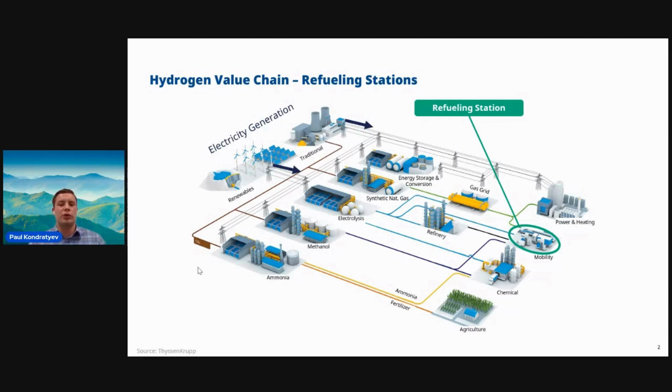and mobility. Anywhere you have compressed hydrogen. I'll be focusing on gaseous hydrogen only, although liquid hydrogen, as the previous presenter mentioned, is also something that shows promise. But I'll focus on the gaseous side, which is a little bit more mature of a technology. So the insights I'll be sharing with you will be relevant throughout the value chain, but I'll focus on mobility.

And one question I'd like to start with is, just ask yourself this question: what do you think is the number one thing that station manufacturers can do to ensure that they're successful, that hydrogen as an alternative fuel is successful? And to me, the answer to that is providing the same user experience as traditional refueling.

And the reason for that is, I think the only way that hydrogen can be the choice of alternative fuel ahead of battery electric is in those use cases where users really do not want to wait as long as batteries need to charge, and are really seeing the value of hydrogen over battery electric, and seeing it as a cleaner alternative to traditional fueling.

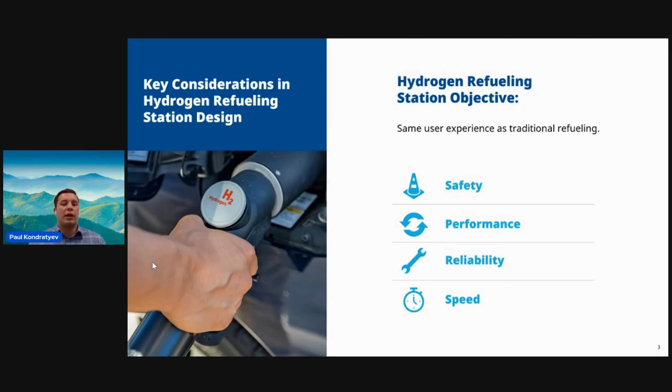And so there are 4 considerations that I will speak about today from a station design perspective that allow this similar user experience to traditional refueling. And those 4 are safety, performance, reliability, and speed. Okay, so let's dive into the first one with safety.

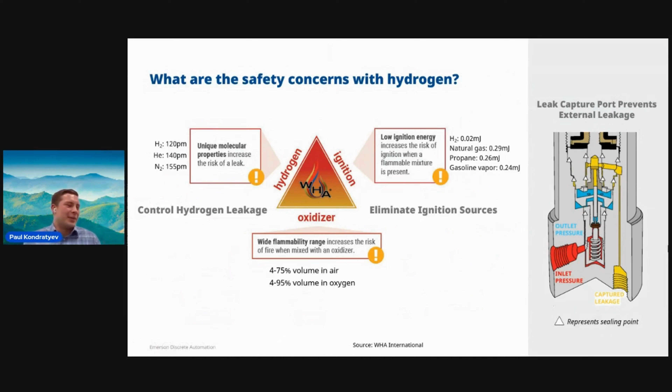And I know talk of the Hindenburg and safety with hydrogen is often a touchy subject. And I want to echo the sentiment of the previous presenter, that hydrogen does present certain safety challenges. However, those are manageable. And so I'd like to speak to those challenges a little bit here with regards to gaseous hydrogen.

First and foremost, hydrogen being a tiny molecule, it is very prone to leakage, right? So here on the left-hand side, I've got some general molecular radii or diameters to compare the molecules against each other. And you can see with its tiny size, no matter how good your seal is, eventually, as it starts to wear and tear, you're going to get some small amount of leakage. And so that's the first factor in considerations of hydrogen safety.

Now, that first factor means nothing if you don't have the other 2 in mind. Low ignition energy and wide flammability range mean that whenever you do get that little leak of hydrogen, once it accumulates to about 4% or greater percentage of volume in air or oxygen, it becomes prone to ignition with very, very little ignition energy from any spark or ignition source that you have in the system. And so that's what, as a component manufacturer for valves and regulators, Tescom provides for refueling stations.

We try to eliminate or control any hydrogen leakage and eliminate ignition sources. And one example of how we do that in a pressure regulator, here we have a cutaway on the right-hand side: if you look at the white triangles, those represent the sealing points in the system. And if you follow the outlet pressure, the blue outlet pressure here, these seals are eventually going to have some sort of leakage when you use these regulators over and over.

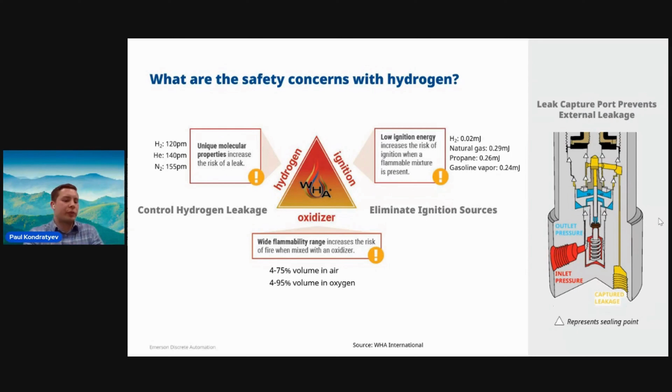And so what we'd like to do is capture that leakage with the yellow area. I can't see my own mouse, but the yellow area in the cutaway represents that captured leak port. That means that the leakage never leaves the system, but rather is captured and vented away to a safe location in a safe manner. So you never have hydrogen accumulating within your dispenser or some other system. So that's safety.

Moving on now to performance. And this is to me a very interesting topic. So on the left-hand side, what you have here is a representation of a hydrogen dispensing event per the SAE J2601 fueling protocol, and there's other protocols in development, but the concept stays the same. The station needs to make sure that the pressure is ramped from lower pressure to higher pressure during the fill, and what you get is this increase in temperature.

And there's two reasons for that. Number one, the negative Joule-Thomson effect of hydrogen. When it expands, it heats up, unlike other gases. And second, you're jamming this pressure into a finite storage, so you're going to get some heat generated. And so in order to stay below the temperature limit of the vehicle tank and not overheat it, the pressure ramp rate has to be controlled carefully so as not to fuel too quickly. You also don't want to go too slow, or the user will have a poor experience.

Therefore, stations are relying on pressure regulators controlled by PID controllers, such as here in this case, a TESCOM pressure regulator with the ER5000 electropneumatic regulator that takes in a pressure set point from the PLC or whatever controller sends that pressure set point, and the controller is able to compare the pressure downstream at P2 to the set point and adjust accordingly, so you can follow that ramp rate live and adjust it as needed based on the operating conditions of the system.

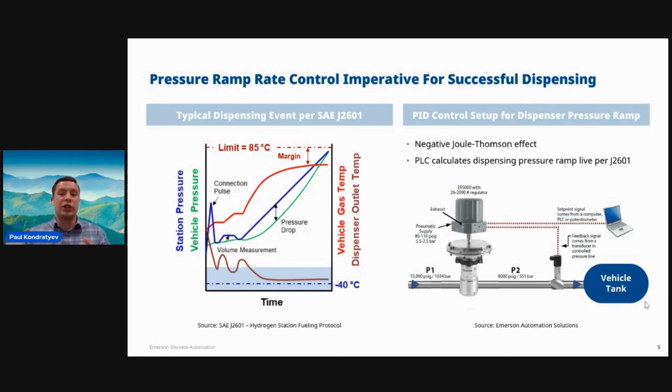Number three, maintenance and reliability, huge. So one of the standards that we like to refer to in hydrogen refueling for valves and regulators is the ISO 19880-3 standard. And it gives us an idea of what we can expect from this harsh environment of hydrogen. And why it's harsh is the high pressures, obviously 15,000 PSI is often the upper pressure limit in a refueling station. When that's cycled back and forth on a valve, especially at cold temperature, the elastomers get really beat up.

And so the guidance per the standard is to replace the soft goods at 16,000 cycles, which, just doing some estimating, at 50 fueling events per day gives you about 6 months of operation. So what we like to do is provide the station operator the easiest maintenance possible. So with the TESCOM VA series valve, you can see here the bonnet is easily removable and replaced with a cartridge swap that allows for fast maintenance. And even in general, obviously, the number one goal is reliability and station uptime.

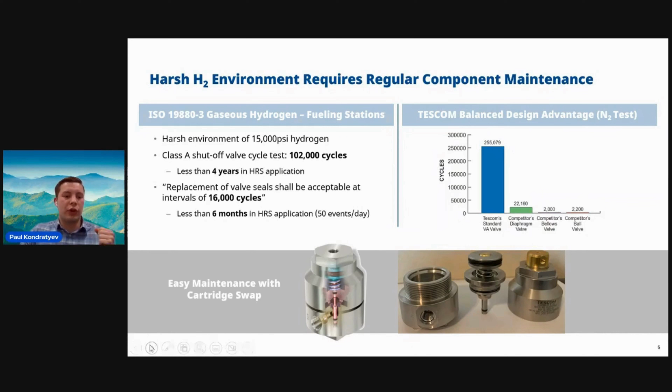And so the best way that we can help the station continue to operate without any extra downtime is by using our technology that we know works better than competition in terms of the travel that the valve has to do compared to a diaphragm valve, a bellows valve, or a ball valve. And so that's something that we know is of value to station operators. So that's reliability.

And as the technology is becoming more mature, we're recognizing that hydrogen as an alternative fuel is most valuable to these heavy duty vehicles, either semi trucks, class 8, or off-road vehicles, stuff like that. And so now you're looking at fueling a 100 kilogram tank, and you want to stay reasonable in your user experience so that these long haul companies choose hydrogen vehicles over battery electric. So that puts some restrictions on the designers of the station.

Now you've got to fuel a 100 kilogram tank in 10 minutes, which gives you a much higher flow rate, almost 5 times what you've had in the past. And so the way that you can achieve that is you really have 2 levers as the station manufacturer. You can either increase your pressure drop, right? Because if your high pressure storage, using that protocol, if you remember the ramp rate, is fueling the lower pressure vehicle tank, you can either increase your delta pressure, the difference of the pressure of the storage tank in the priority panel and the vehicle tank, which allows you to fuel more hydrogen per minute, or you can increase the component size.

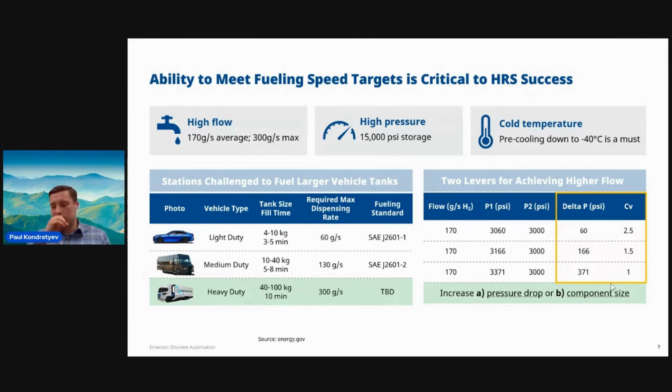And here on the right hand side, as a reference, there's some estimate numbers for a 170 grams per second flow rate, which is on average what you need to fuel 100 kilograms of hydrogen in 10 minutes. You can achieve that with either increasing your pressure drop, as you can see here, from 60 to 371, or increasing your CV, or your rating of flow capacity. So that's another key consideration for hydrogen refueling stations as they design new systems going forward.

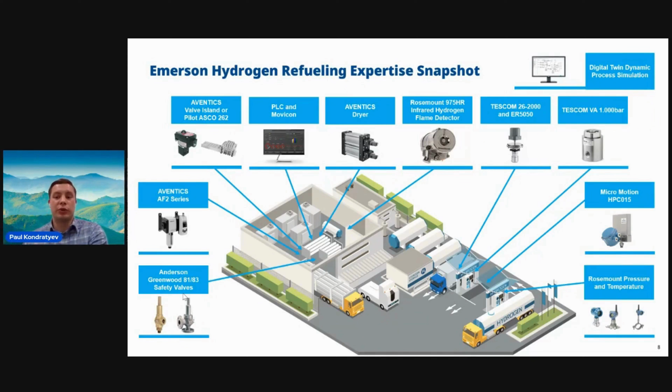And as I go into the next slide, even going outside of just pure refueling, like I mentioned at the beginning, these are challenges and considerations that are relevant across the whole hydrogen value chain. And as we continue growing as an industry, these issues are going to need to continue being solved. And we're lucky enough to have a good amount of expertise in the field, and we always welcome any new feedback or opportunities for learning or development, especially myself in my role.

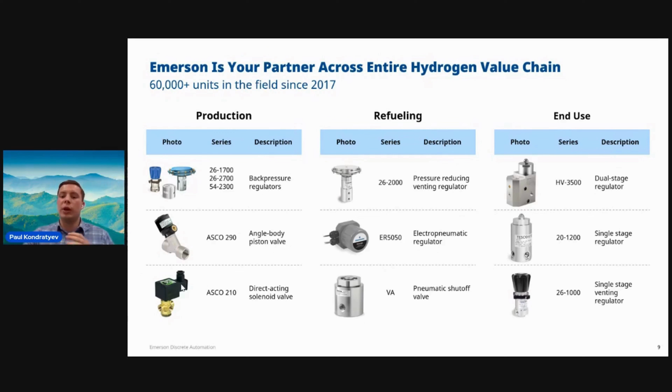So yeah, very happy to be a part of this and just share my 2 cents on challenges of refueling stations with regards to pressure management. And with that, I think we have a couple minutes for questions if there are any.